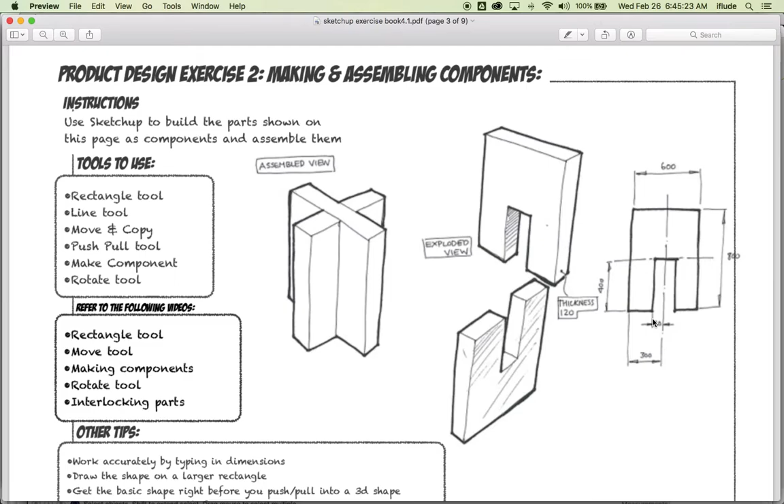So let's first quickly draw up the drawing of what we need. We've got 800 by 600, and we have this little slot in it, which you can see from the sketch. Let me zoom in a little bit. You can see from the sketch the slot between the center point and the outside of the slot is 60. So you have a total width of 120, 2 times 60, and then 300 into the middle minus 60, so I need to make this 240.

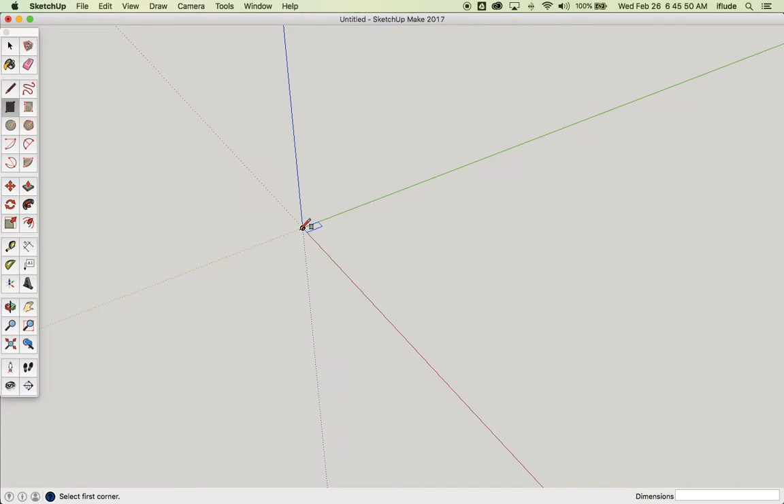So 600 by 800, let's get started with that. There's my 600 by 800. The top of this slot here is halfway, because it's 400 and the total height is 800. So let's drag a guideline in from that point and move so we know we snap exactly to the middle, which is 400. Then 300 there minus 60 means that distance there is 240, so do that again, 240 on both sides.

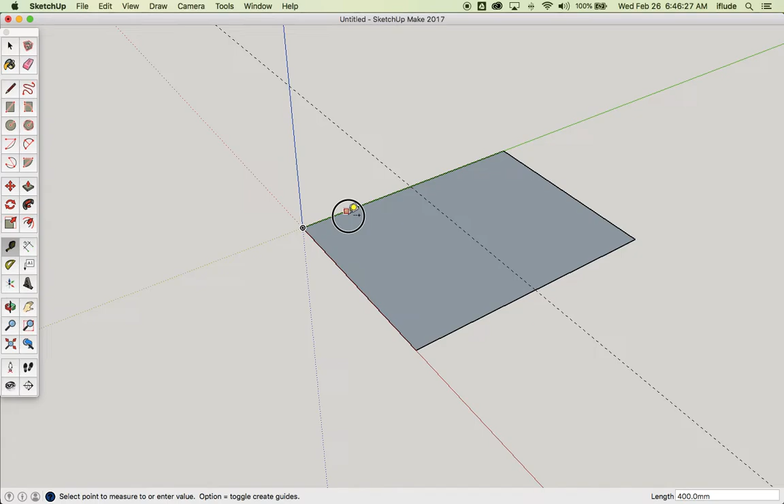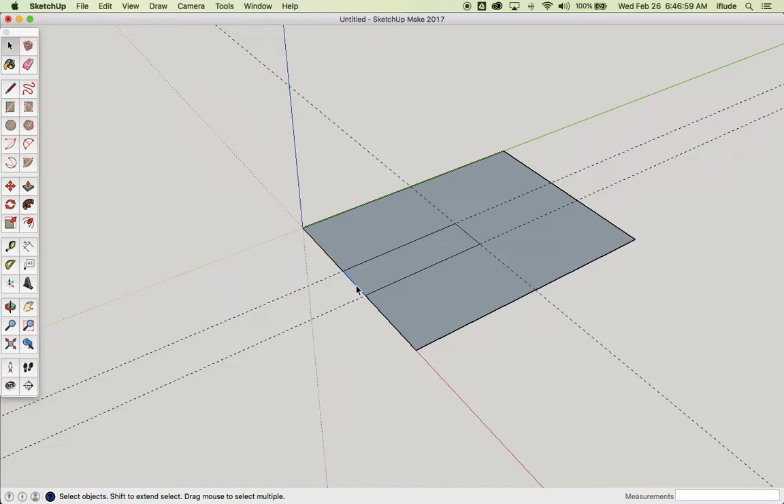Let's just go back a second and try that again. Now we go 240, and this way as well, 240. So now I can take the pencil tool and draw around where I've made my guidelines. Because a surface needs to be a completely enclosed shape, if I delete that line right there, it means the whole thing is going to disappear.

So all we need to do now is push-pull to a thickness of 120, and we should be able to make that into a component. Now you notice there I did that by clicking 3 times, 1, 2, 3, to select the whole thing.

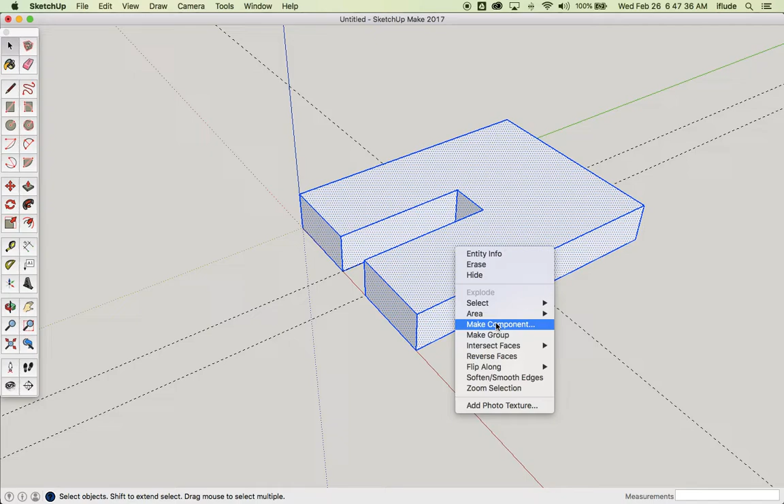And here's the alternative way of making a component. If you right click with your mouse, or control click on a Mac keyboard, then you can make a component using this contextual menu. I'm going to just go up and do this, which is what I showed you before. It's exactly the same. It's component 3 this time because we made component 1 and 2 in the last episode. And click create, and there you see I have my component.

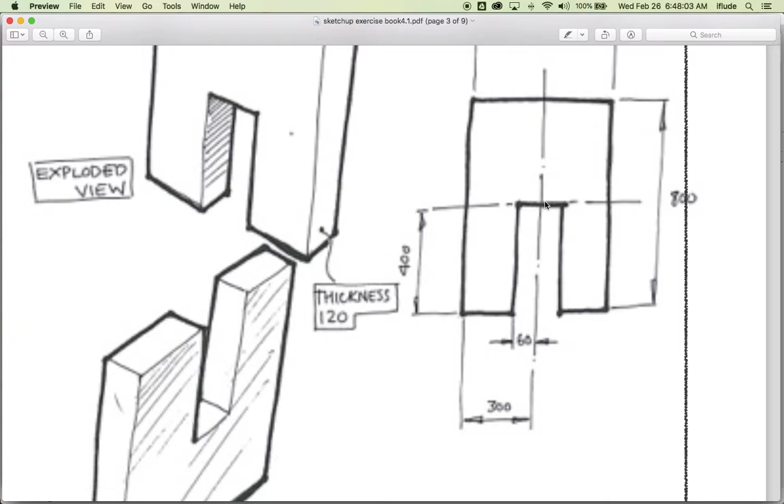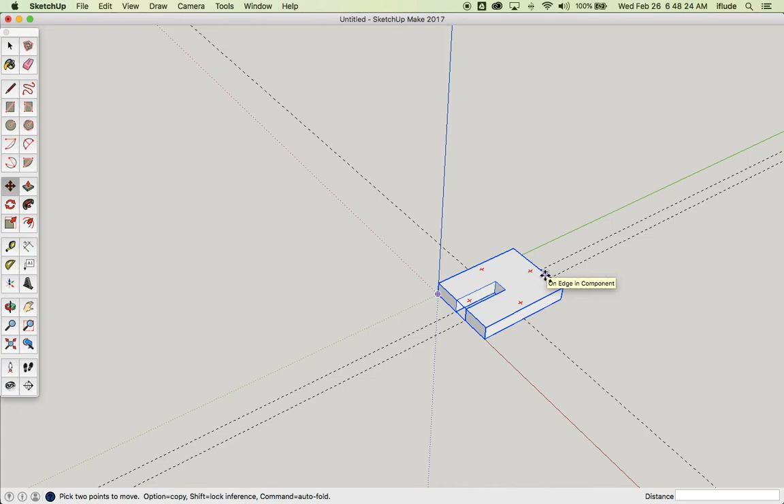Now, if we go back to the drawing, you'll notice this is the only sketch, so what that tells me is that these two parts are identical to each other. In that case, I just need to make a duplicate, and I know it's really easy to do that by taking my move tool and hitting the option key. See the little plus sign has appeared next to my cursor now, and I can just drag that and make a copy of it.

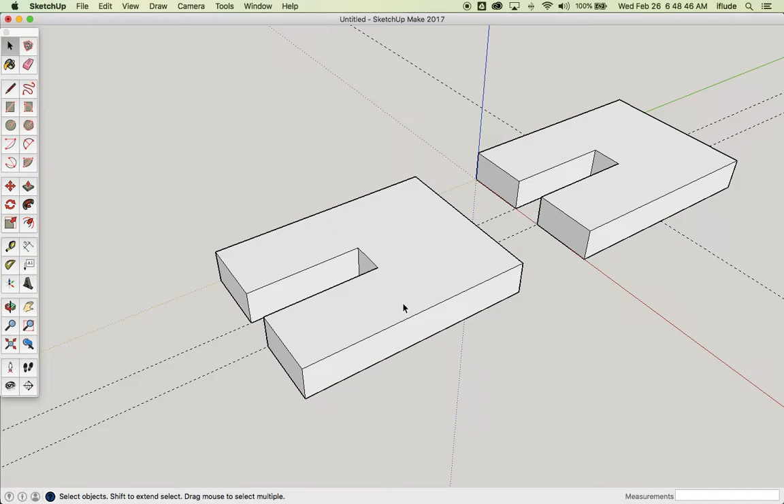So now I have 2 copies of the same component. I now need to get them into position so that I can slot them together, like in the sketch. Now this is where we introduce a new tool, called the rotate tool. I have a separate video about the rotate tool, but I'm just going to go very quickly through how to use it. So the rotate tool is this one right here.

You can see that this thing that looks like a protractor appears when I choose it on my cursor. That means if I was to click on here, I would be able to rotate it in an axis parallel to this blue axis right here. Now if I play around with the arrow keys in the bottom right corner of my keyboard, I can turn it green, and you'll notice there's a green axis right here. That means when I rotate something, it'll be rotated in an axis perfectly parallel to that green axis.

I can also do the same thing, which will rotate it in an axis parallel to the red axis. Now I say parallel to the red axis because it won't be on the red axis, it'll just be an axis wherever I click, which is parallel to the red axis.

So how do we use this tool? Well, first of all, we choose it, and the first point where you click is going to be the place where your center of rotation is. So I'm going to just click randomly at this point here, and now you can see my protractor is stuck to the object, and I now need to click a second time, and you can see now that I can drag it up, and it's rotating around that point.

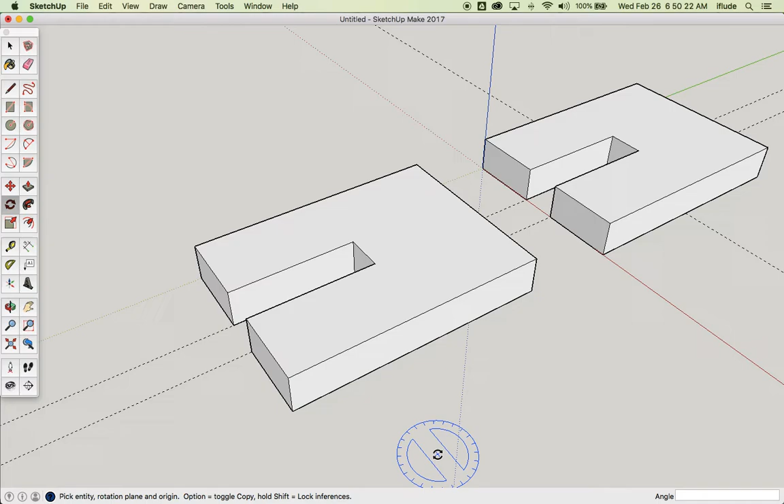I've just hit the escape key, which gets me back into the previous state, and now you can see I'm going to click somewhere else, and it rotates around a different point.

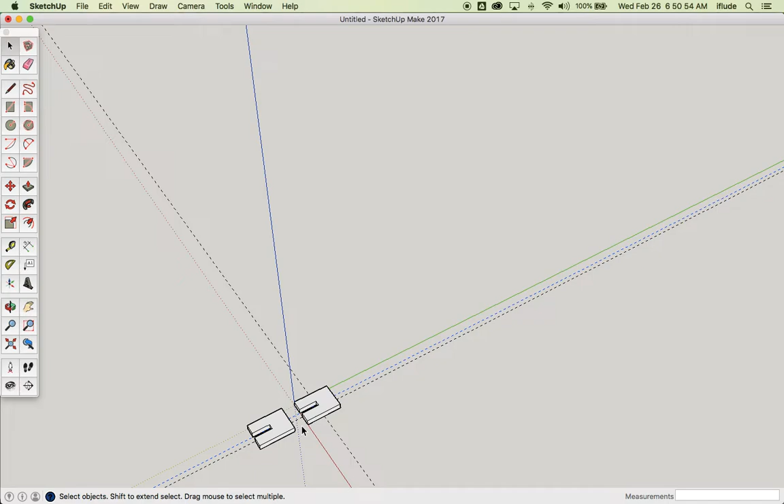So where you rotate is really important. What you've got to avoid, for example, is if I zoom out, if I click over here - I need to first select the thing that I want to rotate. If I click over here, I'm going to be rotating it like that, and that can be a little problematic. So you've got to be careful where you rotate.

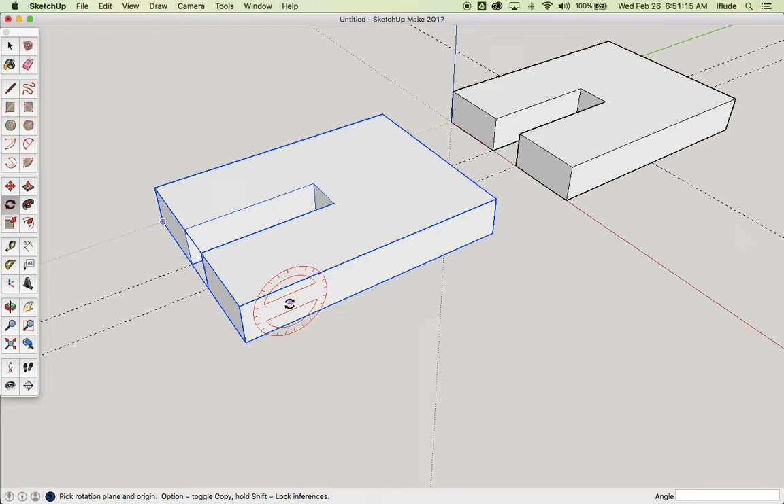So I want to just make it stand up. So I'm going to get into that axis there, the red axis, click, move a little bit, and then pull it up in the direction I want to go. Now you can see in the bottom right corner, as I move up, the angle that I've moved it to is shown. Now I want to do this really accurately, so I'm just going to type 90 and hit the return key, and there I have my first rotated object.

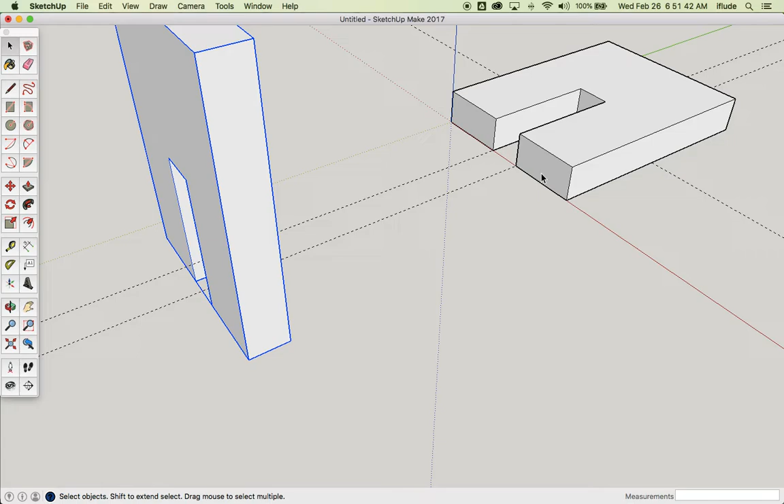I'm going to do the same thing for the other one, except in the other direction. Get it into the red axis, type 90. It's important to just move it a little ways so that SketchUp knows which way you want to move it. Now, these two still won't fit together because I still haven't got them quite right relative to one another.

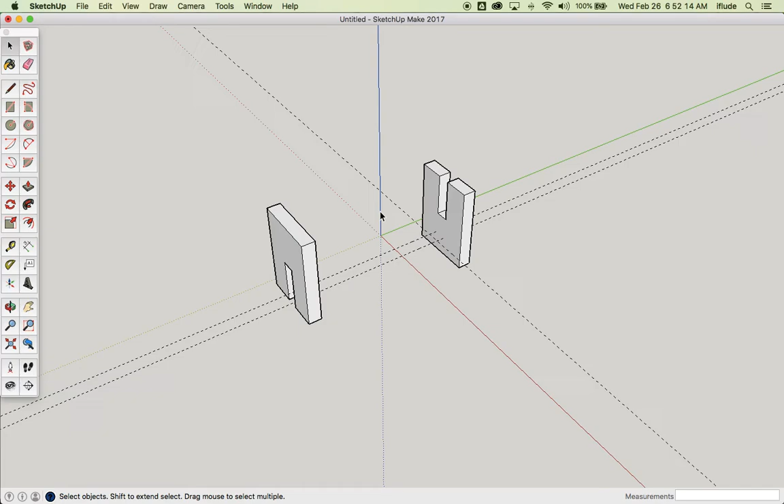So I need to rotate this one in a different axis, and now I need to rotate it in the axis parallel to this blue axis here. So I'm going to select it first, take my rotate tool.

Get it into the blue axis, and you can do that just by moving around onto different surfaces. But you don't have to always use your arrows on your keyboard, but you can. Now I actually have it kind of in default on the blue axis here, so I'm just going to use that, click once, move away a little bit. I'm going to turn it slightly and then type 90.

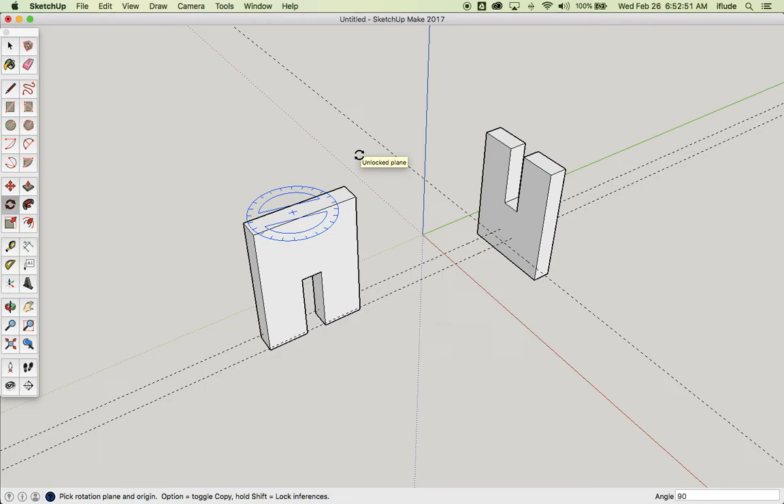And now I have two pieces that I can slot together. So back to select the piece I want to move, take my move tool, and here again I can move kind of randomly, but it won't stick together the way I want it to. What I need to do is choose a point that's going to snap onto another point.

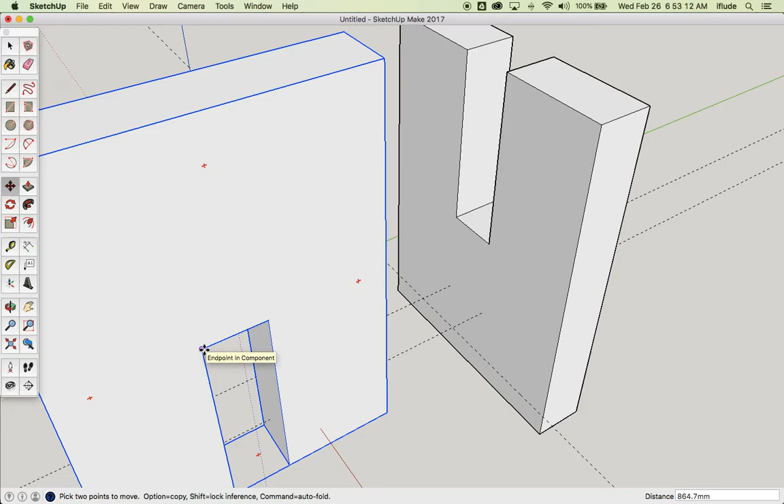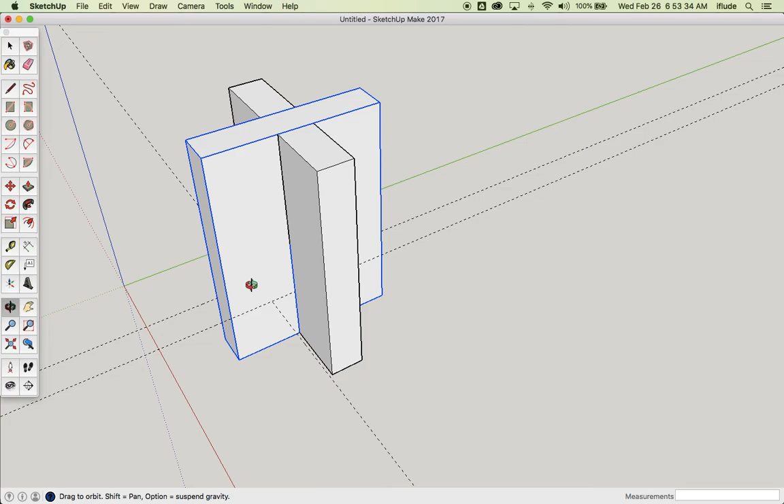So I'm going to pick it up by this point here, this end point, and I'm going to move it and make it snap first of all onto that line, and then move down until it snaps onto the other end point. And so then I have a correctly drawn piece made of two components which fit together perfectly.